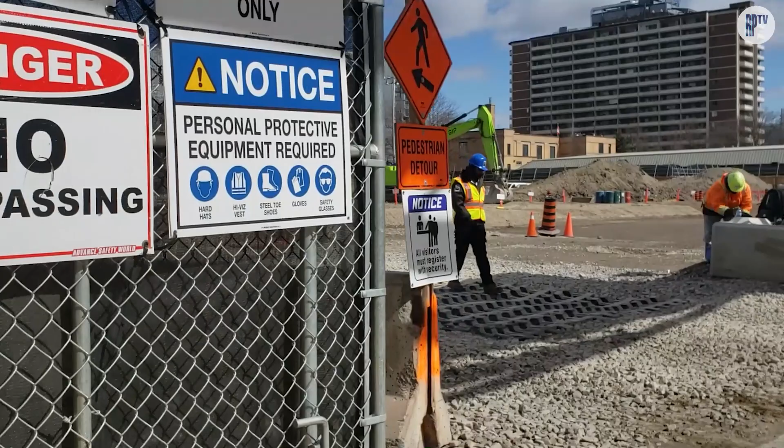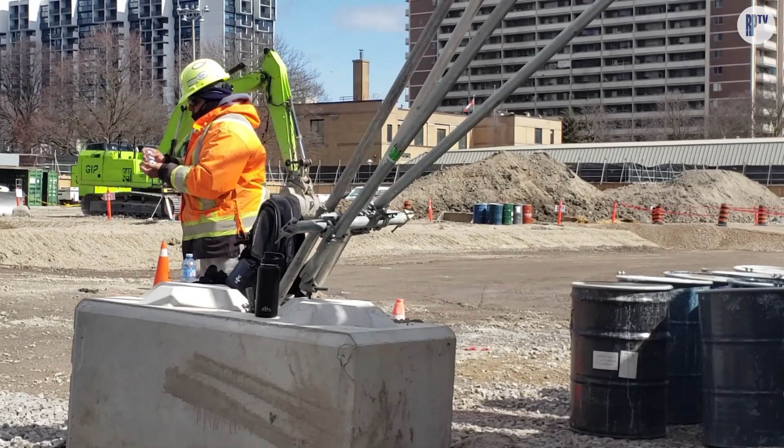Work hours are set from 7 a.m. to 7 p.m. on weekdays, with occasional extensions for consecutive tasks. Residents can anticipate noise from drilling machines and concrete work, along with the presence of various equipment on site. To minimize disruptions, Metrolinx assures monitoring, limited work hours, and adherence to designated routes for construction vehicles.

Despite potential rescheduling due to unforeseen circumstances, efforts are in place to minimize disruptions to the community.

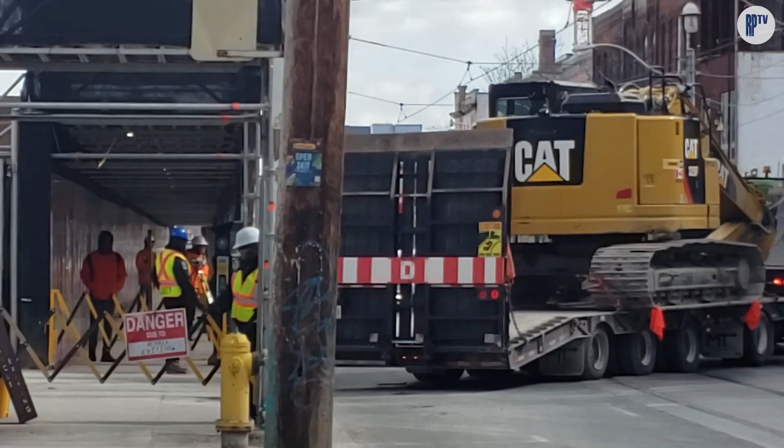We'd like to start off tonight's meeting with a land acknowledgement. Let us take a moment to acknowledge we are on the lands that have been and continue to be home to many Indigenous peoples, including the Anishinaabe, the Haudenosaunee, and the Huron-Wendat peoples. We are all treaty people. Many of us have come here as settlers, as immigrants, or involuntarily as part of the transatlantic slave trade, in this generation or generations past. We acknowledge the historic and continued impacts of colonization and the need to work towards meaningful reconciliation with the original caretakers of this land. We acknowledge that Metrolinx operates on territories and lands covered by many treaties that affirm and value the rights of Indigenous communities, nations, and peoples. We understand the importance of working towards reconciliation with the original caretakers of this land. At Metrolinx, we will conduct business in a manner that is built on a foundation of trust, respect, and collaboration.

At Metrolinx, we like to start all our meetings with a safety moment. It's always important to be aware of our surroundings and try to stay as safe as possible, particularly on transit. Some quick tips for a safer commute: always mind the gap and watch your step, hold on to handrails and grab bars to prevent falls while riding the train, stay alert and report any suspicious activities in your surroundings, respect personal space, avoid crowding fellow passengers, and keep your bags clear of the walkways to prevent accidents. Be sure to watch your step, as the weather is all over the place so sometimes it can be slippery out there.

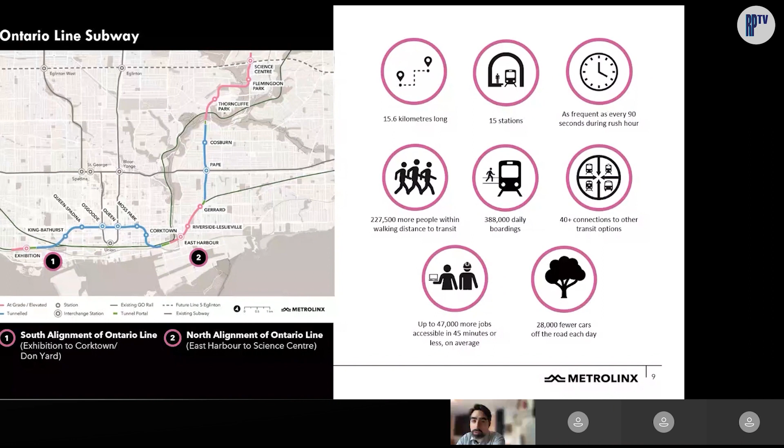If you could go to the next slide. So the Ontario line is being delivered by various contracts. Today, we'll introduce you to the Ontario Transit Group, who is a delivery joint venture with Ferrovial and Vinci Construction Grands Projets that is delivering the south segment, or the southern portion of the Ontario line, which is highlighted on the right-hand side in yellow. It's basically the portion between Exhibition Station and just east of Corktown Station.

The OTG group, the Ontario Transit Group, will be delivering 6 underground stations. 2 of those are very important complex interchange stations right underneath the existing subway at Osgoode and Queen, and they will do that while not impacting and maintaining the operations of those 2 stations, as well as one major above-ground connection at Exhibition Station. Finally, while also building all the stations, the OTG will be delivering and building a tunnel between all these stations in the downtown, that's around 6 kilometers of tunnel.

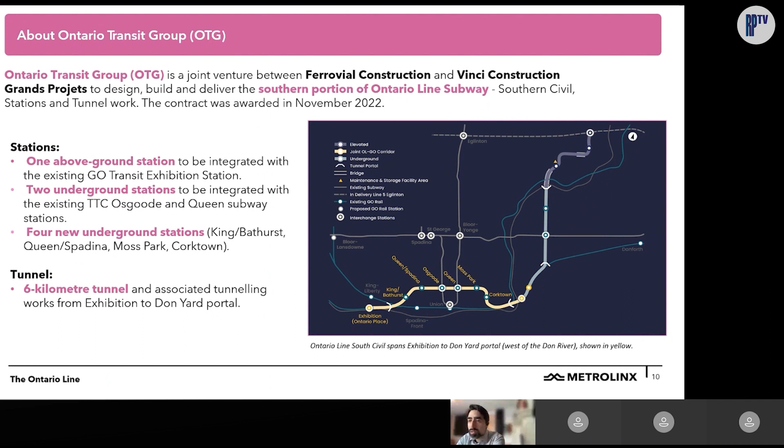So with that, I will hand it over to Eric to take us through the construction aspect of Moss Park.

Thank you, Daniel. As detailed before, the main purpose of this program tonight is to discuss the piling operation and what the community can expect from that at Moss Park. But first, I'd like to give a little bit of context of what we've been doing to lead up to this milestone for the station.

Since the fall of 2023, in November, we have been installing what we call protection and preparation. For the protection, it is the hoarding installation, which is just a fancy way of calling our site perimeter fencing. If you've been in the area recently, that would be the plywood perimeter that we've developed around the site. Its primary purpose is for public safety, to delineate the public from the construction activities within the site, but it does provide additional benefits as well, which we will touch on later in the presentation.

For preparation, we have been rehabilitating the site within the fencing to construct a working platform that's going to be suitable for the duration of the project, allowing us to deliver the station proficiently and safely. All of those efforts have been leading up to this week, which we are now ready to begin piling. In the coming days, you will see the program we talk about this evening, which is going to allow us to begin the piling program.

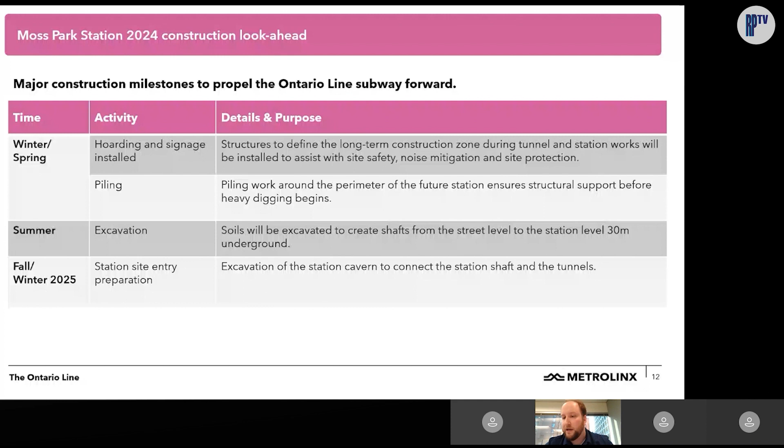After we complete the piling program, the next steps in the summer timeframe are going to be the station excavation, and after that will be the construction of the station from the ground up. But we'll provide some more context on that later. Next slide, Amanda, please.

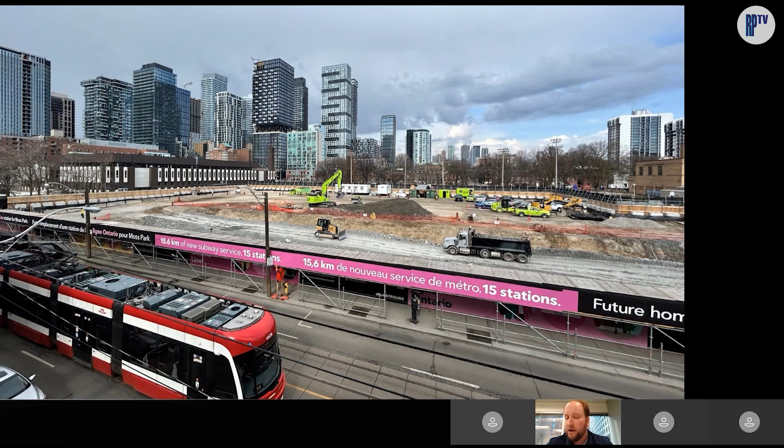As it is today, it's a little bit more complete, which is ready for piling commencement. But again, this is to help people understand the methodology and the process involved in our works.

Next slide, please. Okay, so a little bit more focus on the pile drilling. Before going right into detail, I'd like to emphasize the word drilling specifically. I think it's very natural for people to anticipate the word piling with pile driving, which is another methodology that's pretty common in Ontario and in Canada in general.

The unfortunate stigma about pile driving is the invasiveness, the impact—it's pile driving, hammering. But the good news is we're not pile driving, we are pile drilling. That's hopefully going to be for the great benefit of the community and the local environment, as it should be much less invasive and impactful to the local surrounding.

So what is piling? It's simply a foundational technique that we use to construct a support system in the ground. It provides us stability and support to protect the adjacent facilities and structures, which allows us to dig a hole in the ground, to put it simply, and construct the station from the ground up. It involves drilling multiple holes that overlap with each other, and these holes integrate to form a wall, which provides a watertight barrier, allowing us to excavate safely.

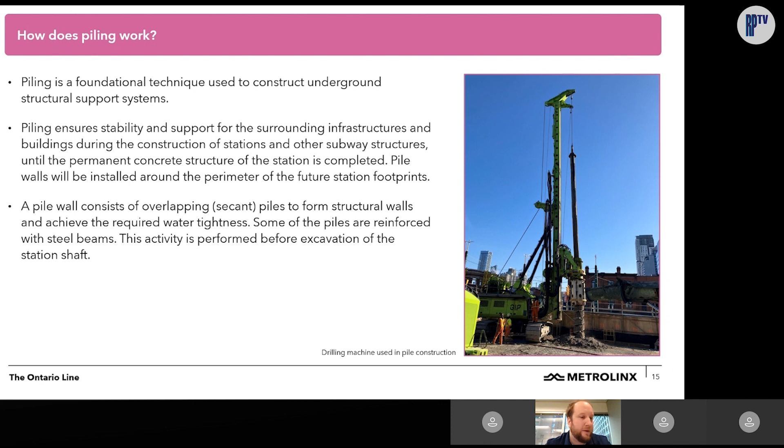A little bit of extra detail on the piling program. In order to install all of these piles, we will drill holes of various depths, ranging between 10 meters and 14 meters, depending on where the bedrock is. These piles are each about 1 meter in diameter or slightly wider, and as I detailed before, they interlock with each other to provide that cohesiveness and stability in a wall.

We construct them with alternating piles. They are called either filler piles or reinforced piles, and the reinforced piles are just another drilled methodology with extra reinforcement, a steel beam inside, to provide extra rigidity. We use drilling machines and a tool called a casing to safely drill holes so that it doesn't fall in

or collapse on each other depending on the ground conditions. And that allows us to auger into the bedrock and then coincidentally pour the secant piles to form the watertight wall. And as that process is completed, we have a resulting perimeter wall that is going to allow us to construct the station.

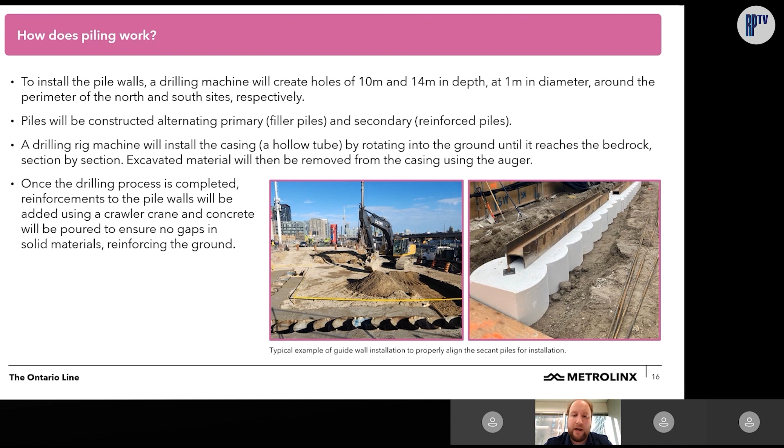And then on the right picture is a little bit of better visualization of how these circular piles or circular shafts interlock with each other and provide that barrier.

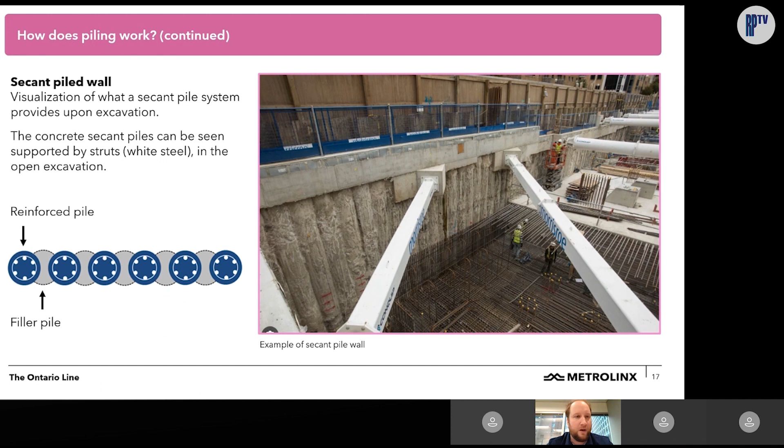We are going to be using two rigs to start simultaneously. That is to keep our installation rate as per what we are expecting for the schedule. They will work in conjunction with each other, but obviously not on top of each other - they will be separated by a small distance.

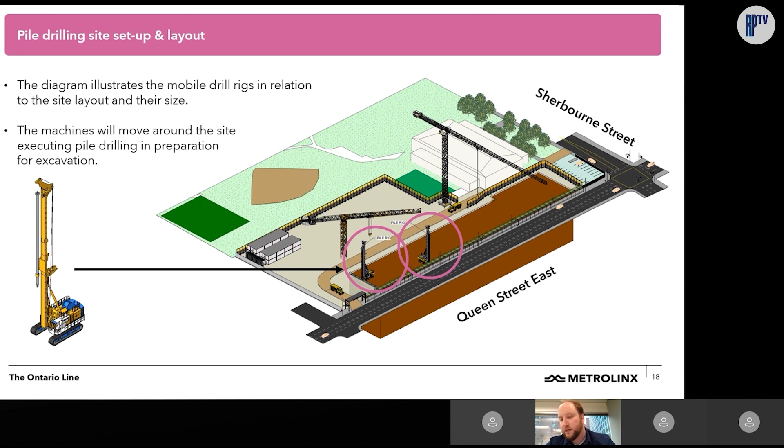In this 3D model, we do have representation of what the tower cranes will look like in Moss Park, but to be very clear, the tower cranes are not going to be installed during the piling operation. This is just to provide a futuristic look as to some of the other features people can expect to see in Moss Park.

So let's talk schedule and sequencing, okay? As I detailed at the start, the piling works are ready to begin now, and that begins with the guide wall installation I gave a little context on earlier. We will look to begin installing the formwork around the perimeter of the shaft, and that's to properly locate where each of these piles are going to go. That's going to be starting immediately within the next couple days.

For work hours, we are always going to do our best to respect daytime working hours from 7 a.m. to 7 p.m. That would be an effort to not have a major impact on people's evenings or sleeping hours in the local community.

For an estimated timeline, with this operation beginning in the next couple of days, the approximate time frame is 4 months duration, so people can expect to see this relative consistency on a day-to-day basis from now until the end of July specifically. And I have it here as an extra note, just as a caveat: weekend work or extended hours may occur as needed.

I want to reiterate and stress it is not our intention to exceed the daytime working hours. We have this as a caveat for a very special circumstance.

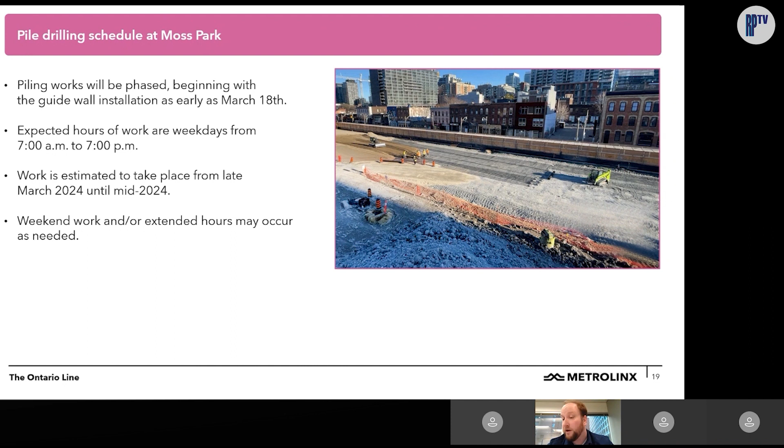Okay, some things to expect from the community standpoint. In conjunction with what we've been doing to prepare for the piling operation, we have become well-versed with the community specifically in terms of some specific impacts. Three major topics are noise, vibration, and air quality, specifically dust. Naturally, we'll always look to mitigate these as best as we can, and we'll touch on a few of the mitigation factors we will be using to help reduce these impacts.

But it stands, some of these will be a feature during the piling operation, hopefully to a lesser extent.

Some of the equipment we expect to use and what you can expect to see on site are the drill rigs, which I detailed in the 3D model. We will have a mobile crane on site to help with the lifting methodology of the steel piles. There will be an excavator to help with installation of the guide wall. And naturally, we'll use concrete pumps and concrete trucks to deliver and install the concrete for each of the piles, okay?

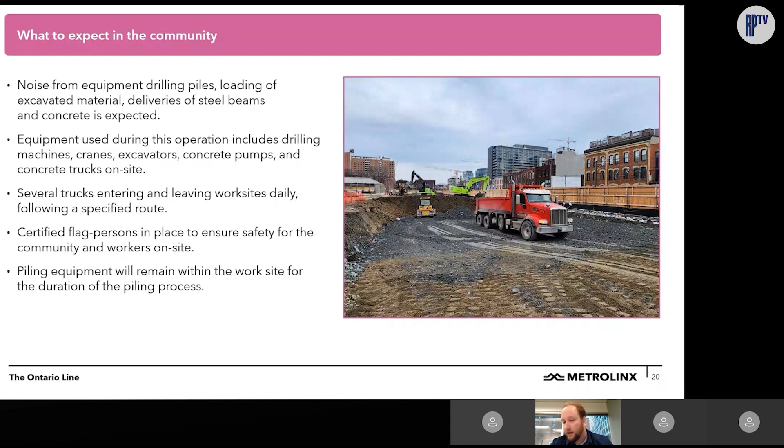As I said before, we will have daily cycling of trucks to deliver the concrete to Moss Park. We'll touch a little more on that in a couple minutes. With this interaction of construction vehicles entering and leaving the site, we will always have certified flaggers at the entrance of Sherbourne and the exit of Queen, to ensure safe and positive interaction between construction vehicles and the continued usage of the sidewalks with the public. The last note is that the piling equipment will remain within the work site for the duration, which will be the midsummer timeframe as I detailed before.

Okay, some reducing factors we are looking to implement to promote this experience and have as little impact as possible in the community. More on the construction vehicles here. As I said before, we will be having a daily flow of concrete trucks to the Moss Park site. To provide a little extra context, our expectation is to install approximately 6 piles per day, 6 shafts per day, and each shaft takes 2 concrete trucks to pour.

So basic napkin math would say we should be expecting roughly 12 concrete trucks to enter and leave Moss Park daily. That would be scattered throughout the daytime working hours of 7 a.m. to 7 p.m., depending on when each of the shafts are being poured. The trucks will enter off Sherbourne into the site, coming north from the Sherbourne-Queen intersection, and naturally they'll leave through the Queen Street exit, heading west towards Jarvis to head south afterwards.

One implementation we're looking to promote is an always-forward methodology, in an effort to reduce any backing up of construction vehicles. Most people who have been around a construction site before have become accustomed to the beeping of reverse alarms, which can certainly be seen as a nuisance. So with this concept, we always strive to have vehicles, construction equipment, and delivery concrete trucks driving forward to eliminate that impact.

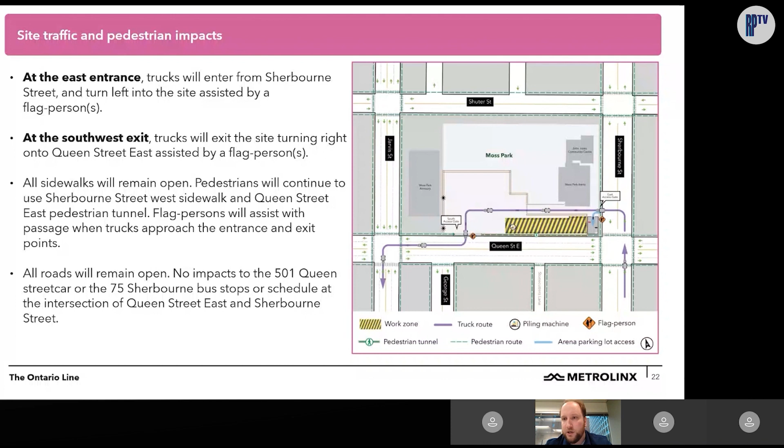Additionally, there are no expected lane closures with this operation, so no interruptions to the 501 Queen streetcar service, no interruption to the Sherbourne bus stops, no interruption to the sidewalk or the public parking facilities along Queen Street.

Touching more now on those 3 impacts that we have been working with the community on thus far. Air quality is a big deal, especially for us. We always want to promote an environment that people want to be around and not feel suppressed by, and so air quality is a big factor in that.

We do have air quality monitors within and around the site to measure any dust or debris generated from the site. As we move through the wetter season into summer and things dry up, we will have water on site to suppress any dust generation and keep the air quality as clean as possible.

The site hoarding, which is that perimeter fencing I detailed before, is a mitigating factor in terms of noise generation. I'll provide a little extra context on that in the coming slide. Daytime working hours are very important for us to maintain, to respect people's evenings and sleeping timeframes. I've talked about the continuous trucking loops to reduce reverse alarms, and as required we'll always have capacities to keep the public interface clean.

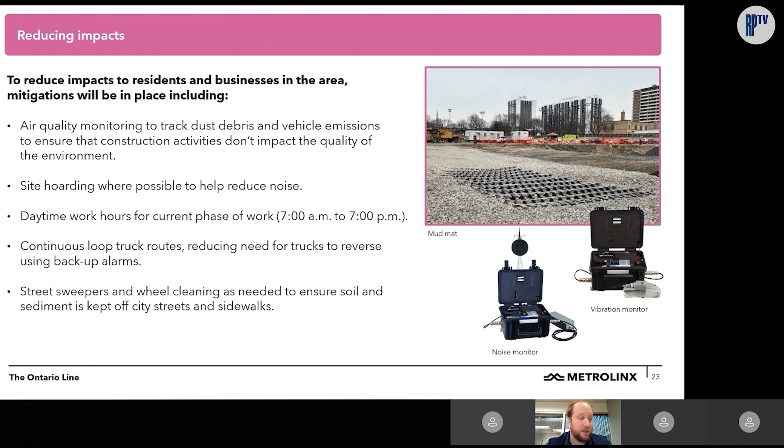So in the form of street sweepers or wheel cleaning devices, which you can see in the picture here, is what we call a shaker mat or mud mat. This removes any silt or debris that would be on a construction truck, so it stays within the site and does not get tracked onto the sidewalks or public roads.

Next slide, please. Okay, specifically on some noise reduction methodologies - most importantly is the hoarding. It does have a noise absorption barrier installed between the two plywood facings that we have around the perimeter, and this is to reduce the noise impact generated within the site and contain it within the site.

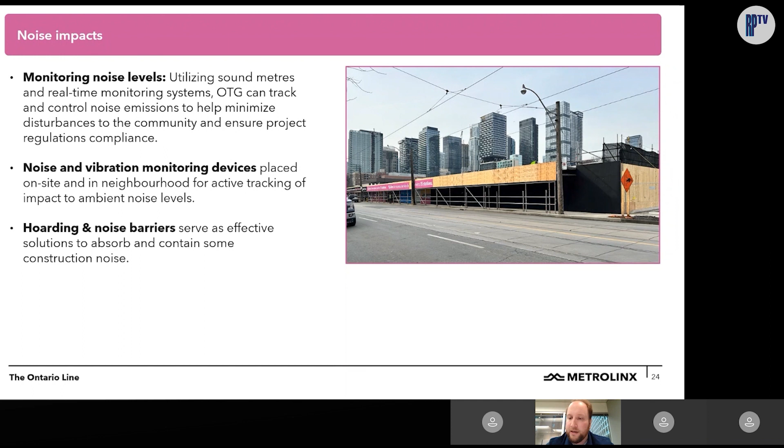We will continue using the operations I've talked about - daytime working hours, elimination of reversing trucks - and all of that is in an effort to help reduce the noise generated within the site. Similar to air quality, we do have noise and vibration monitoring systems as well. These are around the site perimeter and in some local buildings, to monitor the impact we have on the community, keeping us compliant in regards to noise and vibration generation in Moss Park.

And then lastly, some comments about vibration. With the site preparation, we did have material compaction, which I think was well illustrated in an earlier picture. Placing some of the working platform material required large machines to ensure it was properly compacted, and naturally that caused some vibration felt by some of the local community. Our goal is to reduce this as much as possible moving forward, and that'll be true with the piling operation as well.

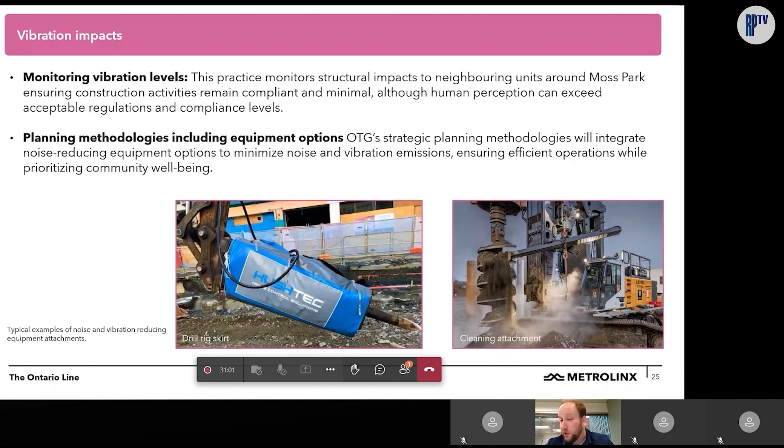So again, these features are all in an effort to help minimize the impact we have on the community, because obviously we want to construct this without making it a negative experience for anyone. And I think with that, I can hand it back to Sean.

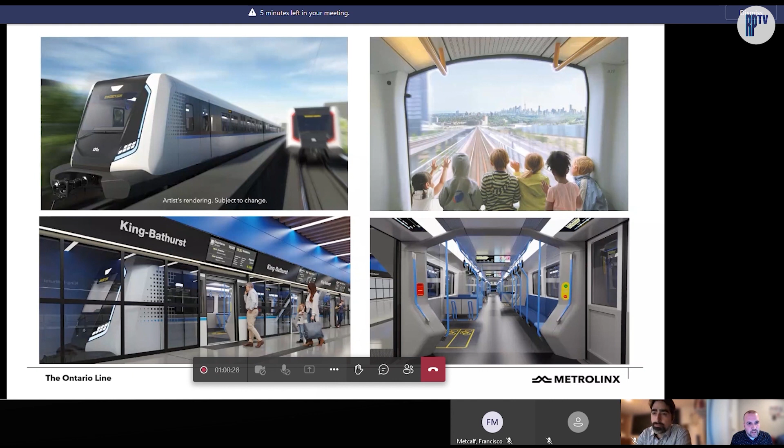Great, thanks, Daniel. So those are our questions from Slido today. Thanks everyone for coming to our session today. And you're seeing some renders here of the future trains.